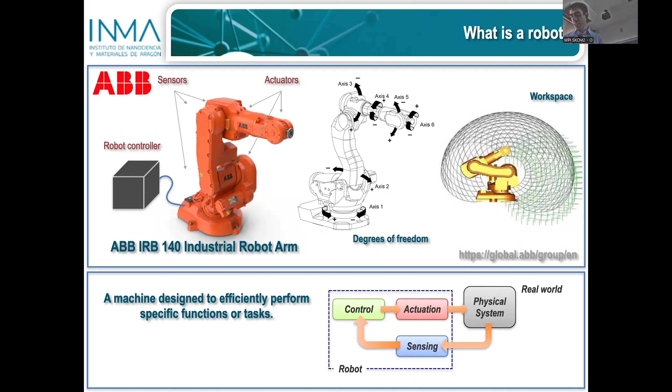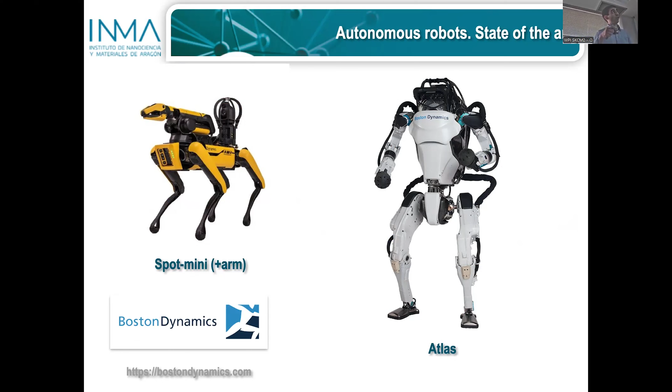Beside these fixed robots, we also have mobile robots—here are a couple of examples from Boston Dynamics. It's really amazing to see how these robots can move. In this case the robot is mobile, so the workspace is enlarged, and it's also more uncertain, unknown in principle. So these loops of sensing, control, and actuation need to become more complex and be done in a more precise way, so the system can go ahead with its function.

Well, I go to the materials. The robots we just saw are mainly made out of metals.

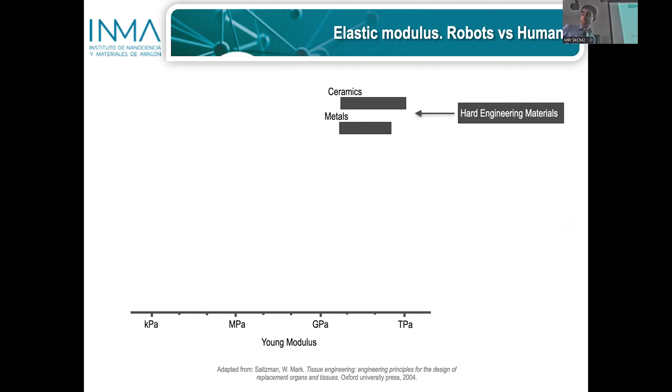They are metallic parts. In terms of mechanical properties, we are in the range of hundreds of gigapascals. If we compare this with the mechanical properties of biological tissues, we are in a different range, in the best case, in the order of some gigapascals in the case of bone. But if we go to softer tissues, then we go to Young's modulus in the order of a few kilopascals. So there is a large difference between the materials used in conventional robots and the mechanical properties of biological tissues.

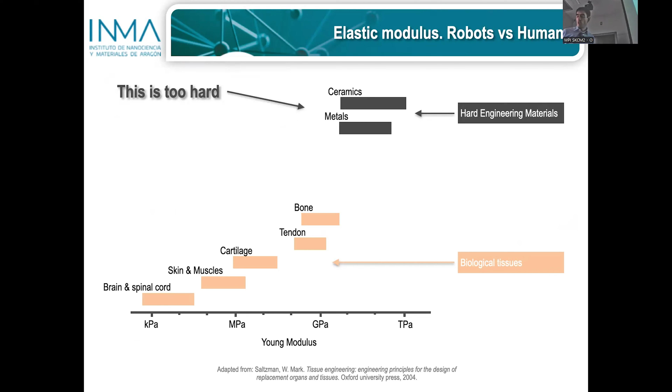So these materials are too hard. This raises some concerns in terms of the interaction of these robots, when collaboration with a human is needed, or when a robot is used to make some action into a body, for example surgical robots. This is why softer materials like hydrogels, elastomers, and plastics are becoming relevant, because we want to incorporate these into robots so that the interaction is softer.

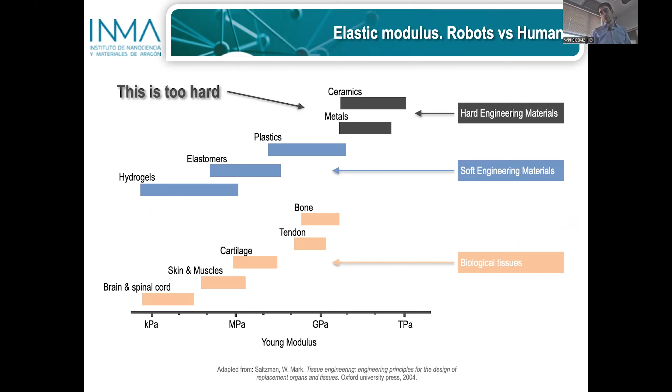And this brings me to one of the topics of the tutorial: soft robotics. Here you have a soft robotic hand made of elastomeric fingers. These fingers are engineered in such a way that they have inner void channels that can be pressurized, and when pressurized, they are able to grab objects in a delicate way.

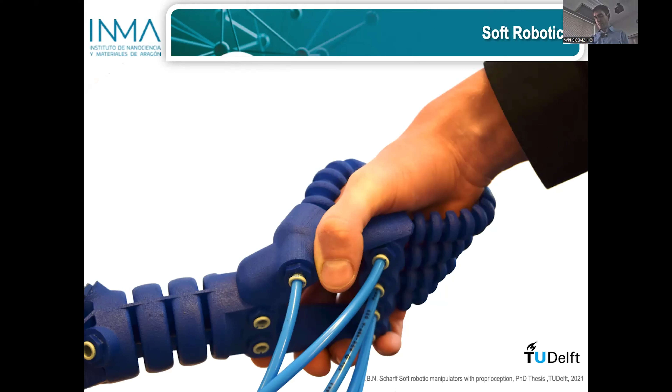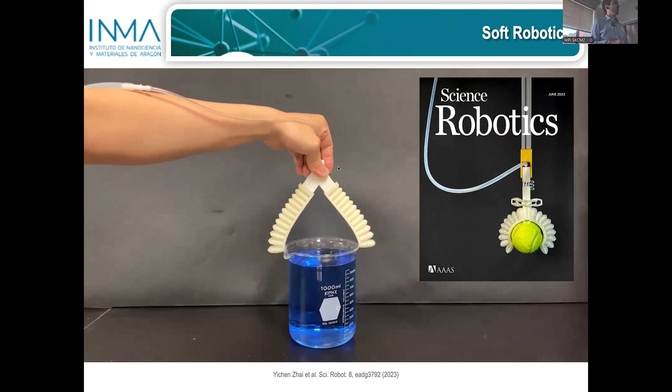So there is a safer interaction with humans. This is another example taken from the literature. It's again a pneumatic system, engineered so that there are differences between one side and the other. This marks the way it will deform when we apply pressure. Here you see how, by controlling the pressure, the gripper can hold a delicate object, a glass object with a certain weight, something that is not obvious for a conventional hard-made robot.

So this brings us to the differences between conventional hard robots and soft robots. While in conventional robots we have metallic parts, rigid elements and joints that pose difficulties to handle delicate objects, in soft robotics, parts of the robot are made up of silicone rubber or rubber.

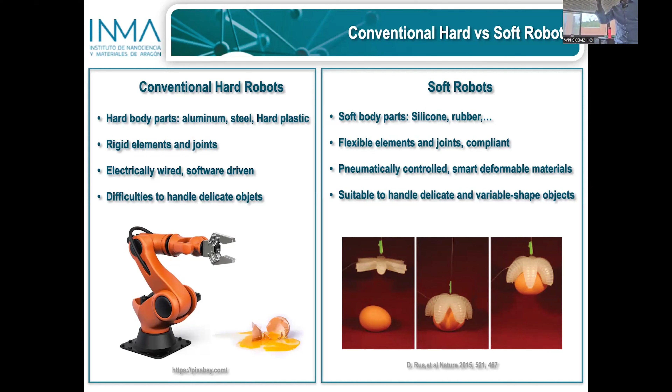They are flexible, with flexible joints. They are compliant, they adapt to the objects they interact with by deforming, and therefore they are more suitable to handle objects that are delicate or that are changing in shape in a continuous fashion, for example very soft objects that deform while you are taking them.

Besides pneumatically driven soft robots, there is a strong interest and trend in using as a soft robotic material, as a material for soft robotics, smart materials. As you know, smart materials are materials that change one of their properties in a strong, important way when they are excited with an external stimulus.

It can be light, heat, or humidity. These materials can be used to generate soft actuators, smart polymer systems that respond and deform in a prescribed fashion when excited. Among these smart materials, I will go briefly into three types: hydrogels, shape memory polymers, and then I will focus on liquid crystal elastomers.

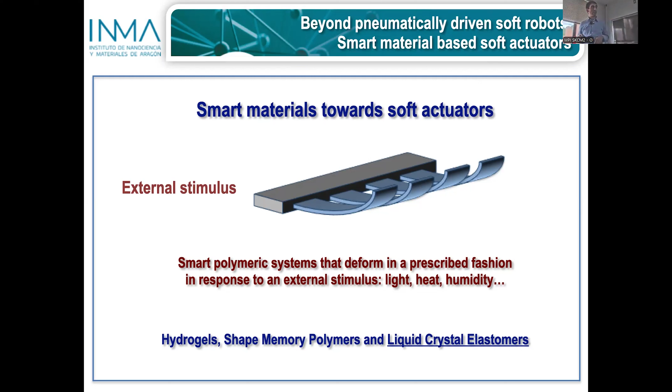That is the focus of today's tutorial. So very simply, hydrogels, as most of you will know, are polymeric networks that are hydrophilic. In the presence of water, they swell and increase their dimensions, and they can change dimension several times. If you then try to extract the water, they deswell again, showing two-way deformation, a reversible effect of the stimuli.

As a disadvantage of these materials, they are very soft, which can be good in certain applications but a limitation in others. They are typically slow in response because they need to uptake water, and due to their very soft nature, they also have a limited ability to generate force.

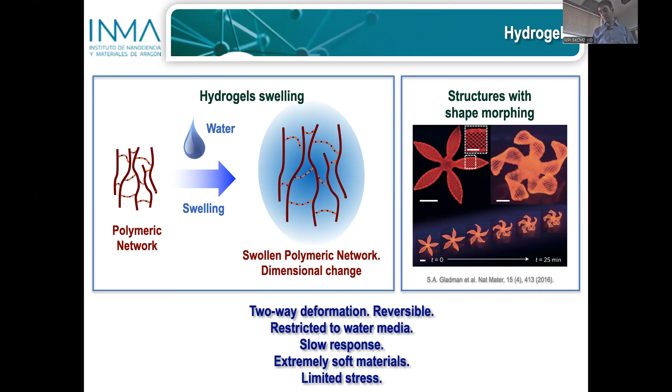Here you have a beautiful example from the group of Jennifer Lewis, in which they printed hydrogels and controlled the deformation of them.

Another type of material of great interest in this area is shape memory polymers. Initially you have a material with a certain shape. You heat the material above a certain transition temperature, that can be, for example, the glass transition for an amorphous polymer, and then you apply a force and a stress.

You impose a deformation to the material, and while imposing this deformation, you cool down the material. In this way, you program the material and fix this deformation, which is released back to the original shape by heating the sample above the transition temperature.

With these systems, you can program, for example, this stent-like actuator made out of a shape memory polymer, programmed just by stretching it in the hot state. You cool it down, and then by heating you can recover back the stent's expanded shape.

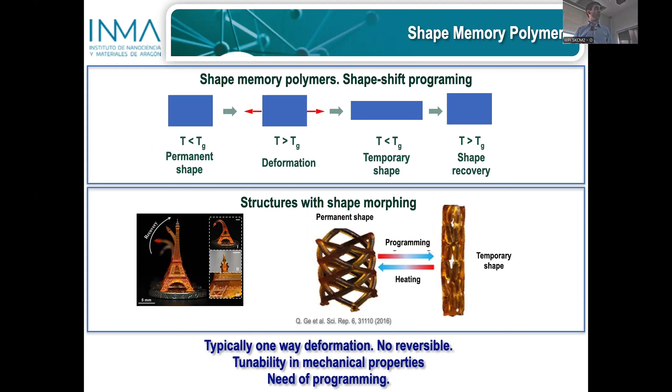Typically, these are materials with one-way deformation, so they are not reversible. A big disadvantage is that they need mechanical programming, which for complex shapes is not always obvious. Also, they are very nice in terms of tunability of mechanical properties.

Finally, we go into liquid crystalline cross-linked systems, which I will focus on more because it's for the rest of the tutorial. These are polymeric networks in which the constituent units are liquid crystal molecules. I will skip the rest of the slide intentionally.

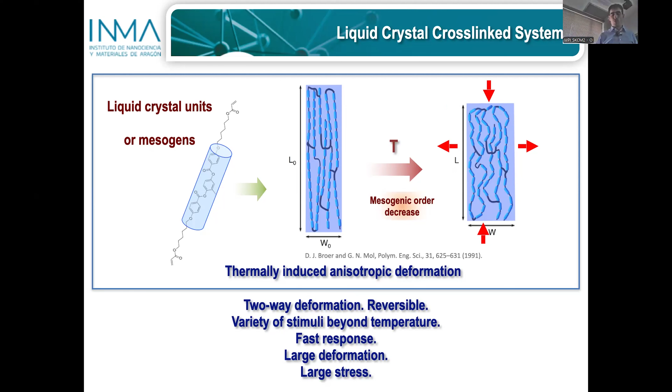I will go back later because I want to revisit liquid crystals. It appeared in some of the lectures these days—I remember Alenka presented on it yesterday. Just to make the tutorial self-contained, we'll also give some concepts on liquid crystals.

Most of you know liquid crystals are made out of molecules with strong shape anisotropy, like this rod-like molecule. This type of material shows intermediate phases between the anisotropic crystal, well ordered, perfectly ordered solid, and the isotropic liquid. In the liquid crystal phase, also named the mesophase, it retains the orientational order of the crystal and has the fluidity of the isotropic liquid.

So they are materials that, in their low molecular weight version, can flow, but have anisotropic properties due to the anisotropic orientation of the molecules, which translates into anisotropic macroscopic properties of the material.

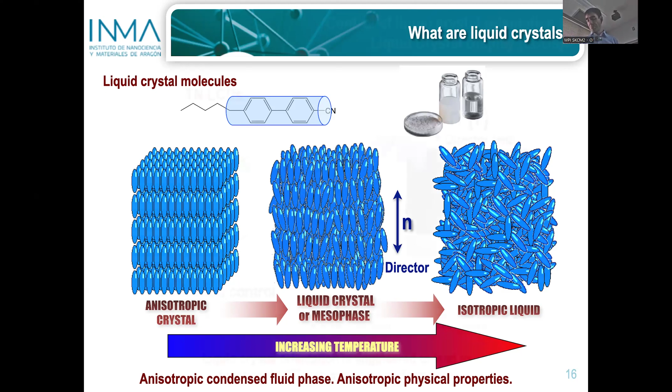...is that you are able to control the orientation at the glass surfaces, controlled in a perpendicular fashion at each surface. The elastic energy does the work to generate this twist, and by applying an electric field at each pixel, you can reorient the liquid crystal and change the optical properties of the system, playing with the polarization to build the electro-optical switch in each pixel of your display.

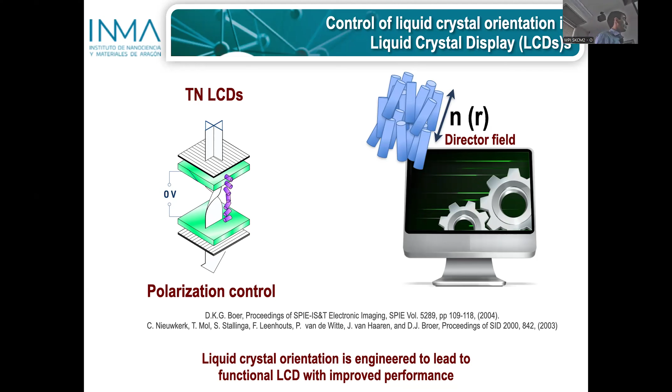Okay, going to how we get this orientation—this can be obtained by simply rubbing a very thin layer of polyimide coating on the glass. You rub this with a velvet cloth in a linear fashion, and then you get grooves, producing orientation of the molecules.

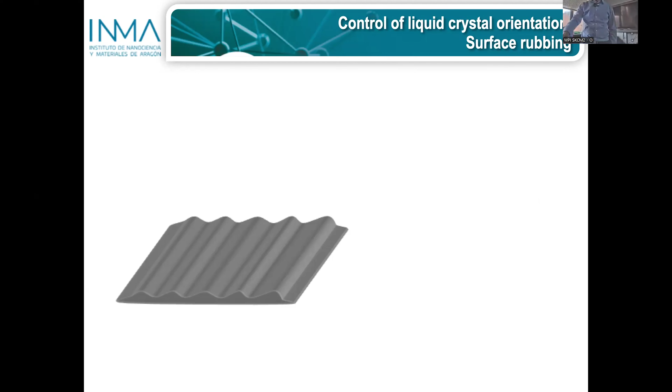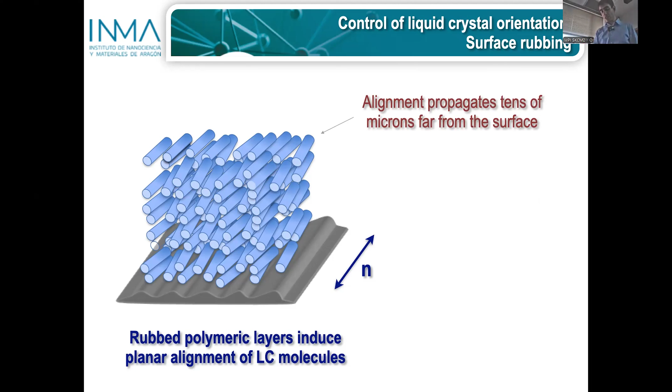You get grooves in the polyimide, and if you put a liquid crystal on top, the molecules close to the surface align parallel to the grooves. Due to the elastic character of the liquid crystal, this alignment propagates far from the surface, typically on the order of tens of microns. Above tens of microns there is a limitation—the liquid crystal order is lost and is driven by other factors, no longer following the orientation of the substrate. As we will see, this will be a limitation in our case.

Another method to get alignment in liquid crystals is with photoalignment materials, photoalignment layers like these polyvinyl cinnamate materials, called linearly polymerizable polymers. If we expose them to UV light and later put a liquid crystal on top, the liquid crystal will follow the polarization of the light. Depending on the material and the dose, the liquid crystal molecules can align parallel or perpendicular to the polarization, but in any case the material registers this polarization of the light and transfers it to the liquid crystal.

So we can advantageously use photolithographic techniques to generate complex patterns in the polymeric layer, which will later be transferred to the liquid crystal that we put on top.

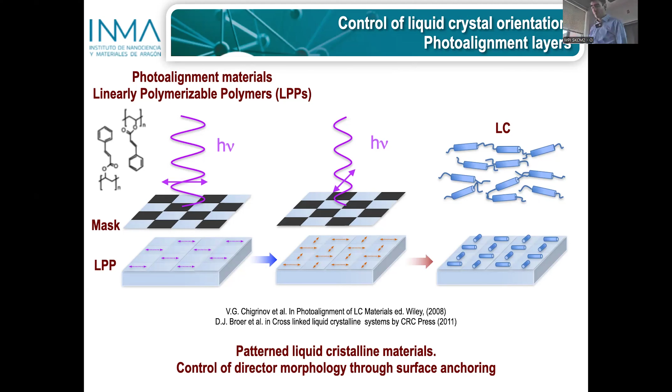Okay, I'll explain how to generate oriented surfaces.

We used low molecular weight liquid crystal molecules in the liquid state - they can flow and orient. But if we use liquid crystal molecules provided with acrylate groups, reactive groups at the end, we can orient them in the low molecular weight state as we saw before, and by including a photoinitiator and exposing the system to UV light, we excite the photoinitiator and grow polymeric chains, linking these acrylate groups to form a polyacrylate chain, fixing the orientation we got in the low molecular weight state.

So we can play with the low molecular weight system and generate a cross-linked system with this. This technique is called in situ polymerization, developed at the end of the 1980s by our friend Dick Broer.

Now we go back to the slide I skipped before. Essentially what we have is this polymeric network, a liquid crystalline polymeric network, a cross-linked system that, depending on the degree of cross-linking, we call a network or an elastomer. Elastomer is low degree of cross-linking, network is high degree of cross-linking, and this impacts the mechanical properties but also the degree of deformation we are able to achieve.

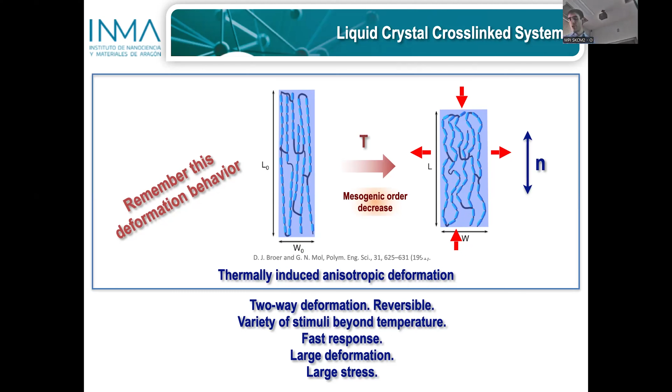Advantageously, you can use a variety of stimuli, as we will see later with examples. They have a relatively fast response. In the case of elastomers, they show a relatively large deformation and can exert a reasonable amount of force, bearing in mind that they are soft materials.

Here I start - we already have the materials, we already explained the materials, we already explained some tools for processing these materials, and now we can have some fun. We can progress towards demonstrating some applications. I want to present a work - actually a long-term project in the group at the Technical University of Eindhoven with Professor Broer and Professor Danqing Liu, who is an affiliate partner of this institute.

In this case, what they did was use these reactive mesogens, low molecular weight molecules provided with acrylate groups, doped with a chiral dopant, and put this material on top of a substrate. The alignment is such - the treatment of the surface is such - that the helices lie parallel to the substrate. So the liquid crystal helices, the chiral nematic, is organized this way. We can see this material as composed of homeotropic regions where the molecules are pointing upwards, or planar regions where the molecules are parallel to the substrate.

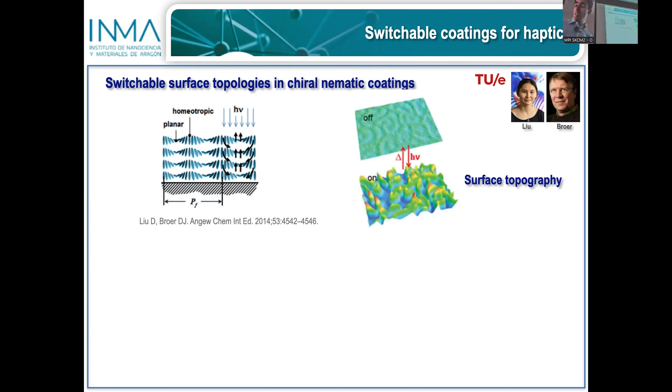Actually, this was very recently published just this year, bringing the group of Eindhoven and Ivan's group together to start this collaboration.

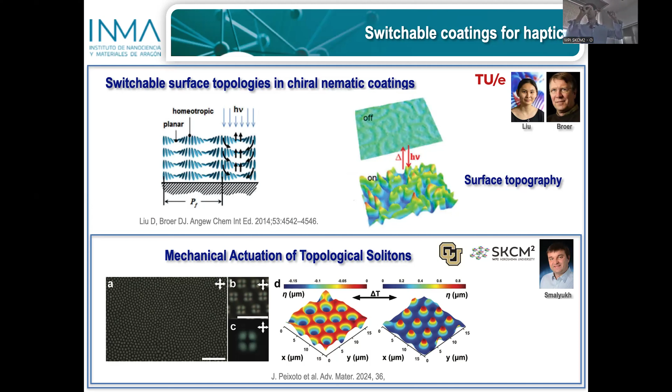Again, having a substrate and this type of material, it was possible to generate topological solitons, either isolated or arranged as self-assembled patterns. Solidifying them with this in situ polymerization technique into a liquid crystal elastomer, upon heating you can get large differences in surface relief localized at the position of the solitons, having potential in haptics applications - this type of protrusion can be felt with the fingers.

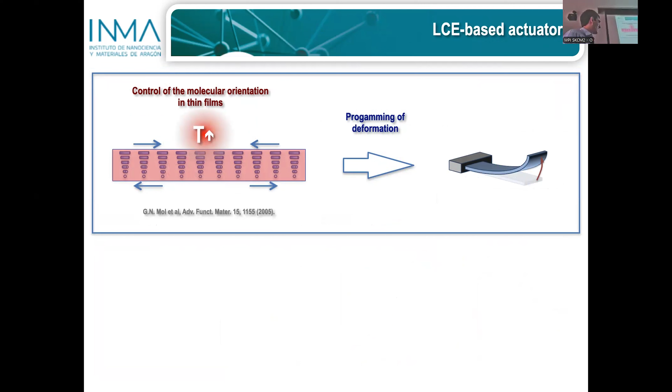Fly traps often store mechanical energy and release it suddenly. But you're not talking about that, right? No, it's progressive. Yeah, the real fly trap is a different mechanism, of course.

Yeah, but the real fly trap is a bit more sophisticated. Thank you.

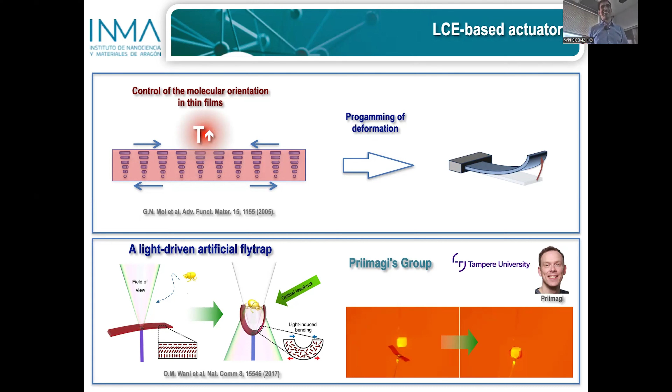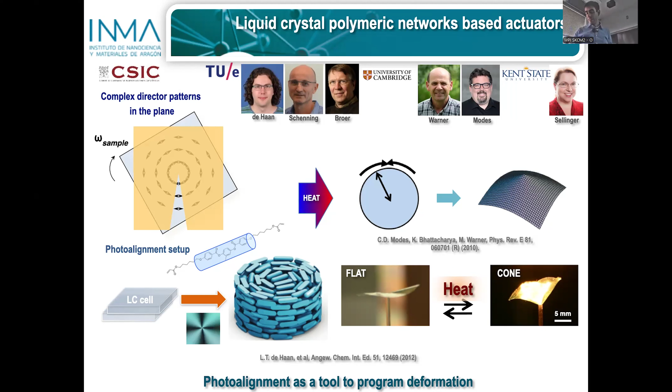If you now heat this material, as Mark and Carl predicted, remembering the deformation rule of liquid crystal elastomers, the system will try to contract around a circle and expand along the radius. But we learned in school that this is not possible — you cannot make a circle smaller by increasing the radius. This can only happen if you go out of the plane and turn it into a cone, where the generatrix becomes longer and the base smaller. So the system, to release the stresses, escapes into a cone. This sample is flat, not totally flat, but when you heat it up you get this cone — later we will see better ones. This tells us that all these alignment techniques allow us to program the deformation of the system.

I showed you until now a couple of techniques based on treatment of surfaces, surface rubbing, photo alignment. All of them accomplish the alignment of the liquid crystal by interaction with the surface. But this alignment propagates only a few tens of microns, so the films we can generate with this technology are in the order of tens of microns, not more. So the amount of energy available in this actuator is rather limited. The processing methodology is also quite complex.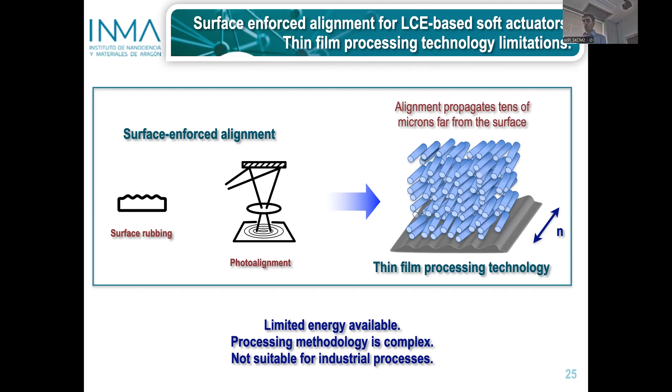I showed you in the previous slide that you have a sandwich made out of glass. You cure the material, you have to break the glass, and many of the samples die in the process. Later you need to cut the sample. It's a complex process that's nice for proof of principle, but it's not suitable for industrial fabrication or production.

So we thought that 3D printing could be a solution. As is very well known, 3D printing is the addition of material layer by layer to create complex objects, and this is very useful to generate prototypes rapidly or to generate personalized objects. But typically, the materials used in 3D printers are thermoplastics, especially for the fused filament type printers, and these generate objects that are inanimate, that do not change shape over time.

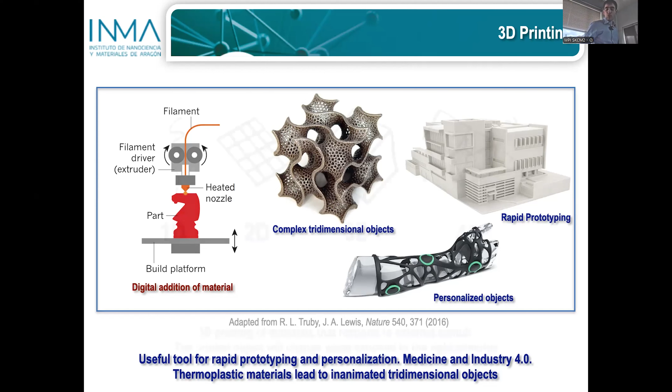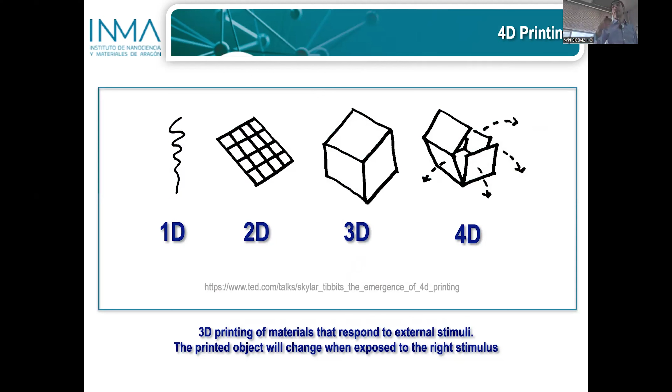Here I bring the concept of 4D printing, introduced by Tibbits from MIT, I think in 2013, 2014, that introduced time as a fourth dimension. Many times 4D printing implies the printing of smart materials to generate three-dimensional objects that change over time when they are exposed to the right stimulus.

In this scenario and context, we developed this in parallel to Professor Taylor Ware at the University of Texas, and Jennifer Lewis at Harvard. We developed the 4D printing of liquid crystal elastomers, and for this we generate a main chain polymer made out of these mesogens provided with acrylate groups at the end.

We generate this macromer by Michael addition of a butylamine and a reactive acrylate, a mesogenic diacrylate. We have this molecule, we add a photoinitiator, and then we can extrude this material through a needle. We can print it, and after printing it, we can cure it with UV light. As we have a photoinitiator, it triggers the polymerization reaction of these groups, so we get a cross-linked system, and we get a liquid crystal elastomer.

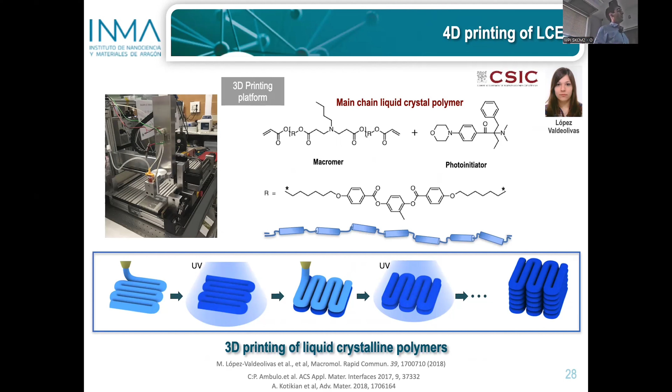This is the time I still have. Okay, thank you.

Printed at different speeds, and we can see that the higher the speed, of course at a constant flow rate, we get thinner layers, and especially for the higher speeds, what we can check with polarization optical microscope and with dichroism measurements is that we get alignment of the molecules, as you see in the cartoon.

So with this technology, we gain digital control of the director, digital control of the morphology of the material. We can control how the molecules are aligned during the printing process.

We can later release these fibers by using a sacrificial layer of polyvinyl alcohol. We remove the polyvinyl alcohol just by immersing it in water, a very simple process, and we get this straight fiber.

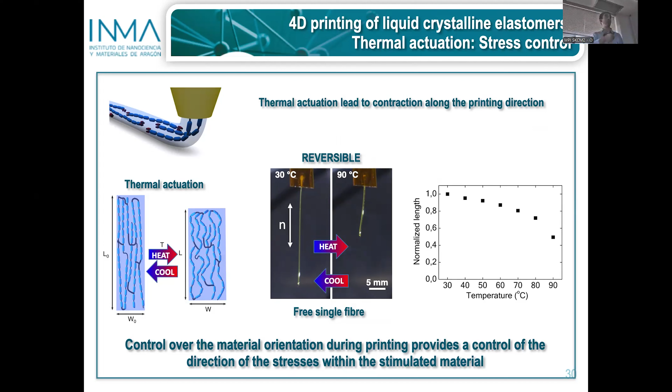When we heat it up, as expected, we get a fiber that is shorter, that contracts. If you look carefully, you can see it also has some expansion in the perpendicular direction. So this digital control we have in the morphology is now translated into a digital control of the stresses we have in the printed material, in the liquid crystal elastomer.

We can get continuous layers of material by printing adjacent lines, and here you can more clearly see that the stripe on heating contracts along the director, along the preferential orientation direction, and expands, as you can see in the plot. Due to the additive character of the system, we can generate multiple layers, so we are not limited anymore to the thin layers we had with the previous thin film technology.

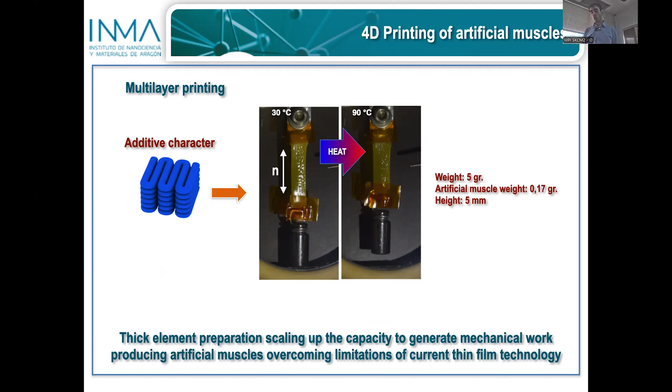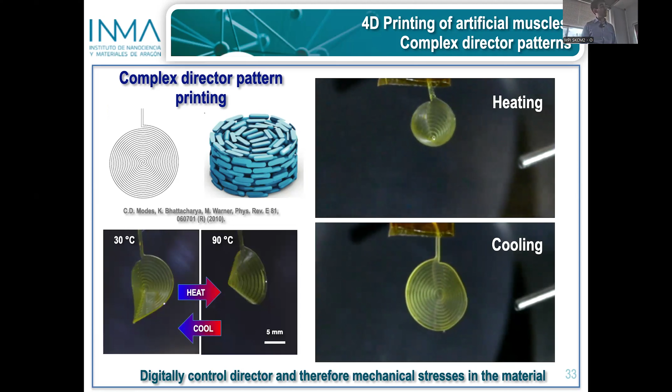Here you have again something, it's a spiral pattern that is a good approximation of the azimuthal pattern that we saw before. Here you see the sample at 30 degrees, but when you heat it up, as we explained before, the system goes into a cone. Now it is more clear, more neat, and when cooling, the system recovers the original flat state. So we are able to control these stresses in a quite precise way.

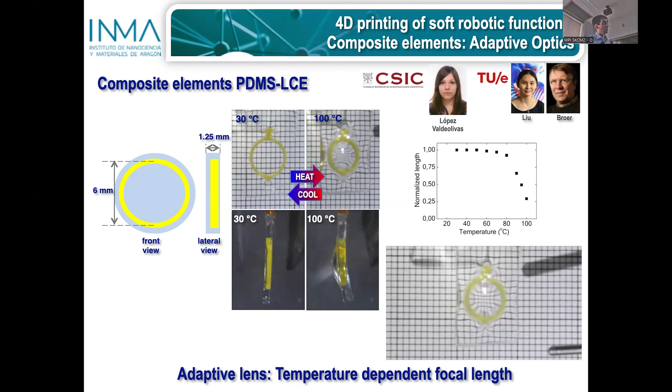We have also embedded these materials in PDMS, in other elastomers. Here you have a ring of our material embedded in a slab of silicone, of polydimethylsiloxane, and on heating, due to the asymmetric positioning of the ring with respect to PDMS, we have buckling. This compression causes the PDMS to buckle out of the surface and generate a lens, whose focal length depends on the temperature.

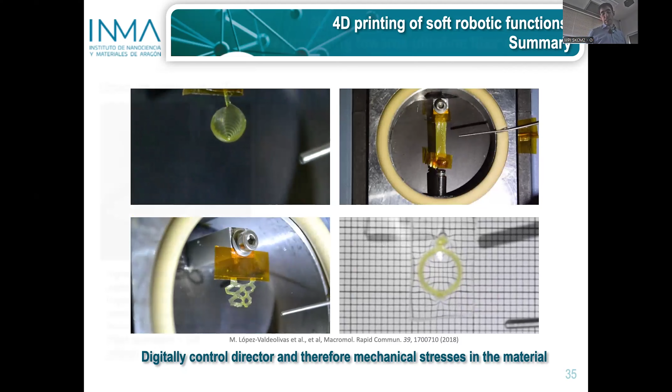So, as a wrap up of this part, the digital control of the director allows us to get digital control of the stresses and implement with these actuators, soft robotic actuators that respond to them.

As I said, we have this, but we are also trying to push the limits of our technology. We see that we have a limitation in terms of the fiber diameter. We wanted to go smaller, but you cannot go to nozzles below 100 microns, because then the pressure is too big, and you cannot generate fibers in this nozzle.

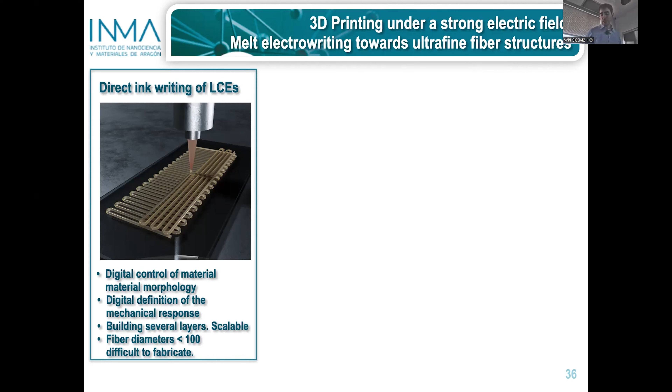So we decided to explore this technique, melt electrowriting. Melt electrowriting is a technique developed by Paul Dalton, released in 2011, and essentially the principle is very similar to that of extrusion, but in this case, a high voltage is applied between the nozzle and the collector, the receiving substrate. So a strong electric field is generated in this area. The polymer gets charged, and the fiber is drawn.

Even having very little pressure, the fiber can be drawn to the substrate, as we will see in the next slide. This generates very thin, ultra-thin fibers that can be precisely, digitally positioned, like you see here in this polycaprolactone system described by Paul Dalton. This has been the main material used with this technique. It's a technique from the biomedical world, so they use this type of thermoplastic material.

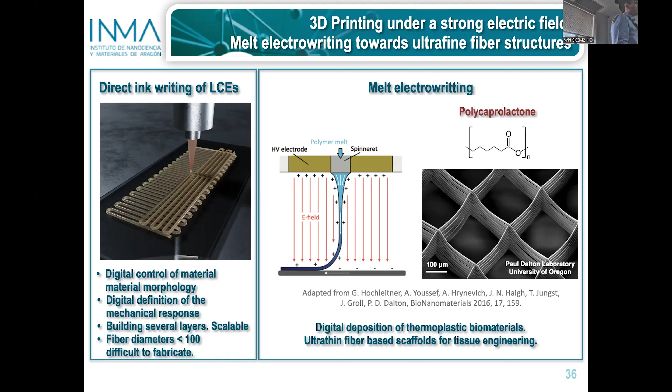However, we decided to try with our elastomers, the same material I showed in the previous slide. If you have no voltage between the nozzle and the substrate, nothing happens - the material is not able to flow. But as soon as you apply a high voltage of some kilovolts, the material appears, gets charged, and is drawn into a fiber, and at the end we get an extremely thin fiber that we can move in order to generate structures.

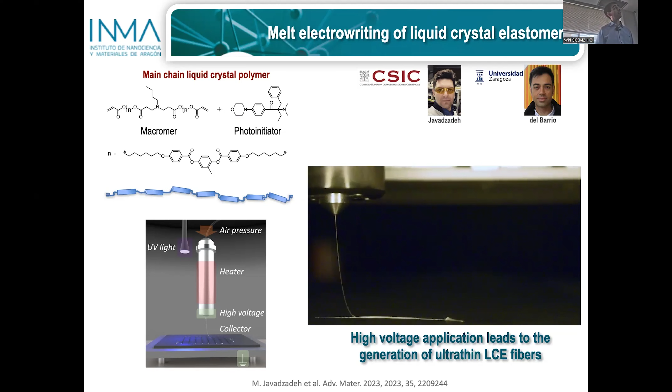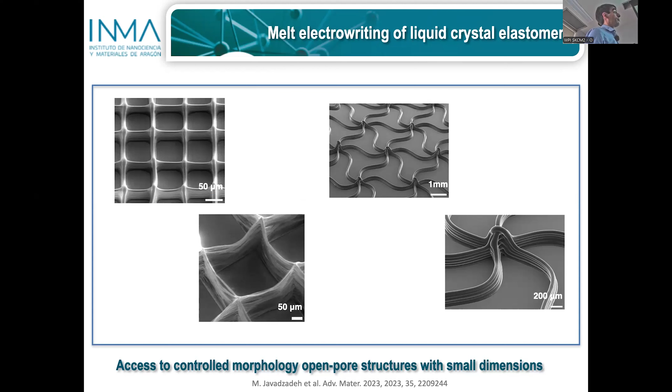As a result, we were able to get structures that you can see here in the order of 100 microns. Actually, we now have much smaller fibers, in the order of a few microns, and spacings in the order of 90 microns. You can also build up walls of material and go to curved structures.

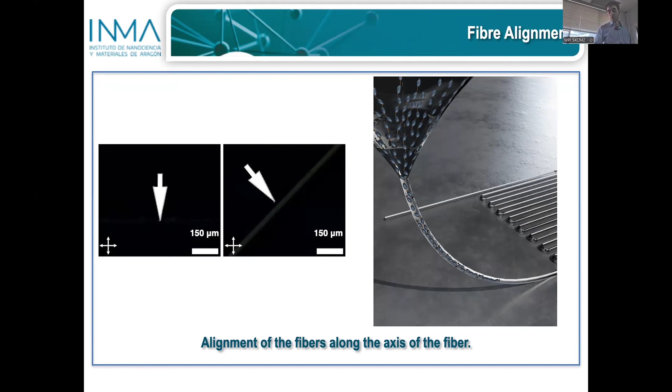Again, as in the case of conventional 3D, 4D printing, this drawing of the fiber towards the collector generates birefringence, generates alignment in the fiber. So again, we gain digital control of the morphology of the material in our structures, allowing us to generate structures that respond mechanically on heating, as you can see in these videos: this auxetic structure that is framed and generates this rectangle, or this anti-chiral structure that on heating makes the nodes rotate clockwise or counterclockwise depending on the node.

Also, the system is able to generate a significant amount of work. As you can see, this small spider net is able, on heating, to raise this steel ball.

Everything I've shown up to now relies on temperature excitation, but in order to move toward applications - since the temperatures we used were quite high - we need to progress toward other types of stimuli, and I will show you a couple of examples. Many of them have been tested in the past with other technologies, but we are focusing on 3D, 4D printing.

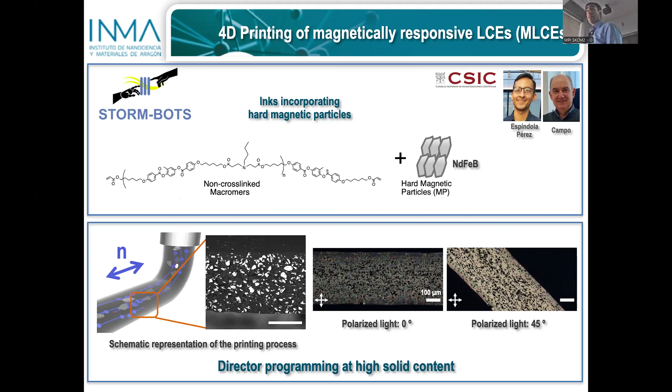So we first go to magnetic materials, a collaboration we did with Javier Campo, also a member of this institute, in which we included hard magnetic particles in our polymers. By appropriate dispersion we can generate an ink that can be printed, and we can maintain the alignment of the liquid crystal despite the high load of magnetic particles. So we can program the director even with such an amount of particles. That is an advantage not possible with conventional techniques.

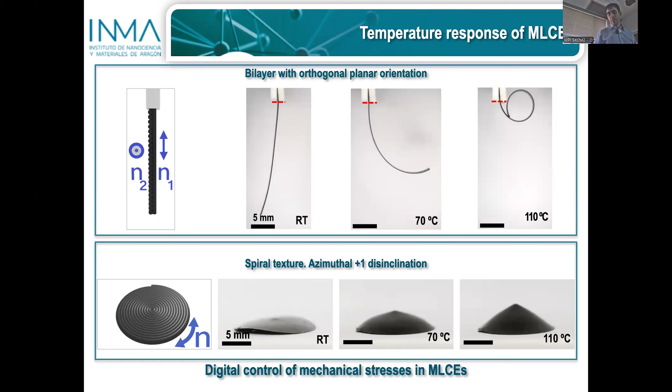Here you have a bilayer, like a twisted nematic, and on heating we get this bending, and again the azimuthal sample turns into a cone on heating. So we are able to keep the typical liquid crystal elastomer mechanical deformation, but we have an extra degree of freedom in actuation, as we have magnetic particles dispersed in the material that we can program with a strong magnetic field. If we expose our film to a strong magnetic field, we magnetize the sample and generate magnetic moments that are stable even at the high temperatures we use for thermal actuation.

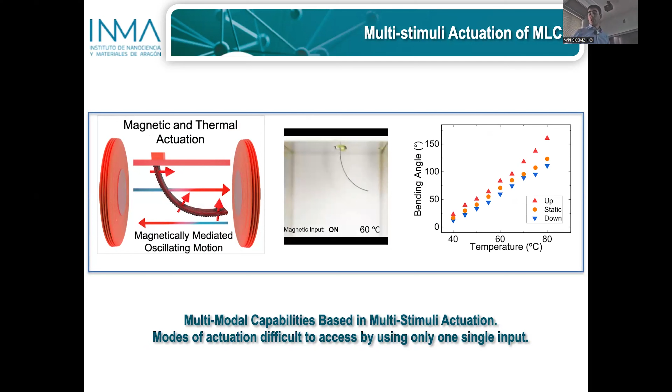So now we can combine these two stimuli, thermal and magnetic. For example, we can heat the sample to generate some bending to a certain level, and then apply an oscillating magnetic field. You can see that we can reach different modes by combining different temperatures and different voltages, generating modes of actuation that are difficult to achieve with a single stimulus.

And we try to make use of these multimodal capabilities. Here you have an actuator that is a bilayer, a bimorph like the other ones. By heating it at a certain temperature, the cantilever bends.

We have put a small mirror in the cantilever, so a laser reaches it and is reflected onto the screen. By changing the temperature, we can move the spot up and down on the screen. But if we fix the temperature, we center the spot at some point on the screen.

Now, if we put a couple of coils, one perpendicular to the plane of the film and one from the back, and apply a small magnetic field in this coil, we get a bending of the cantilever, and then the laser on the screen moves up and down.

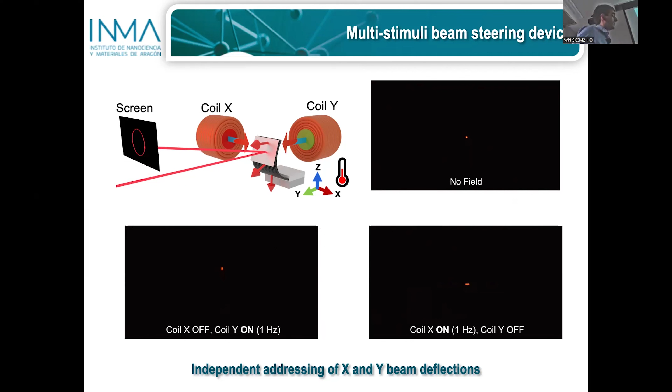If we remove this magnetic field and apply voltage to that coil, then we get a torsion of the cantilever, and then we get a horizontal movement.

We can combine both coils and apply a couple of sinusoidal signals, and if they are in phase, then we get this linear movement. But if we start to play with the frequencies, we can generate a variety of Lissajous figures, demonstrating the capabilities of these multimodal, multi-stimuli actuators.

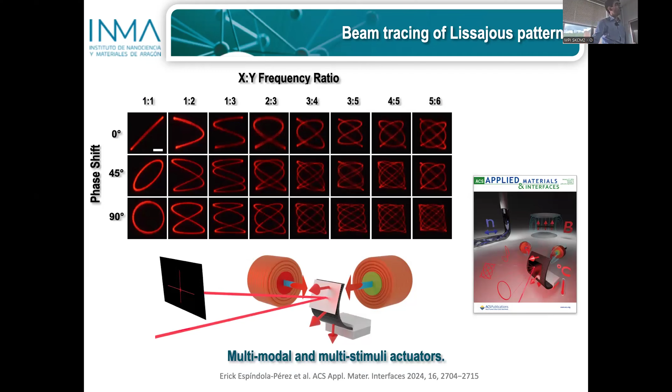We go now to light, because we are being very slow. Obviously, with light you can heat the material. The light, the material absorbs. You can dope the material with molecules that absorb light, and therefore light can be turned into heat. So we will be playing the same game as we saw in the past.

But we also like to include in our system this interesting molecule, azobenzene. In the thermodynamically stable state, it has this elongated pro-mesogenic shape, but when you irradiate it with UV light, it isomerizes into a form that is not mesogenic. This molecule disturbs the liquid crystal phase, and depending on the substituents we put on these carbons, we can make this more or less stable. In the system we will show you, we have a substituent that makes these molecules very stable over time, lasting for a few hours.

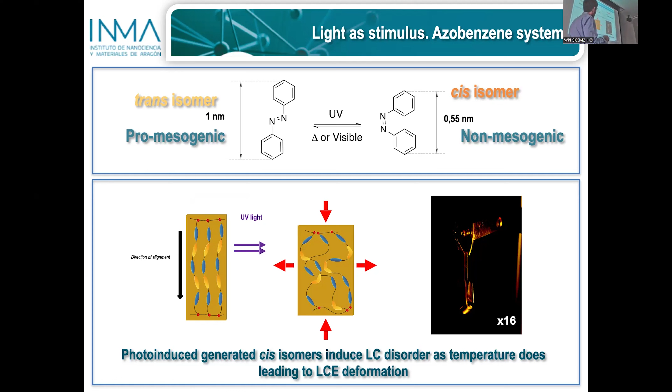So if we expose this to UV light, we generate a strong population of these molecules. If we then irradiate with visible light, or leave it, or heat it up, we go back to the pro-mesogenic shape. We incorporate this molecule into our materials and expose it to UV light, and even with no temperature change, we expect something like this to happen. This was in the literature, but not done with this type of technology. So we included this molecule in our inks, and we can see that upon irradiation we get a strong contraction of the system, also strong heating, as you can see here.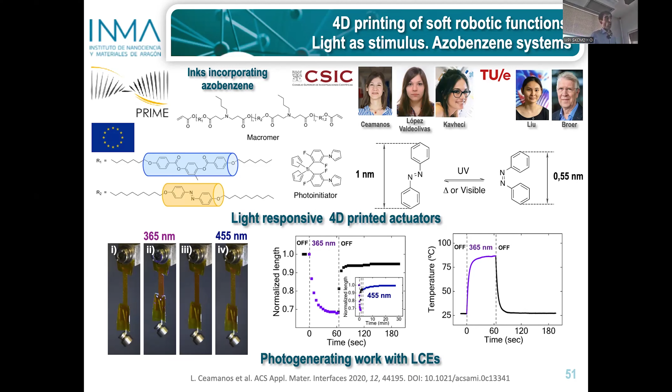When you remove the UV light, you get to a level different from the initial one, and this level is due to the presence of molecules that disturb the order in the liquid crystal. This is checked by immersing the system in water, which we did in this work. You put this in water so the heat is taken by the water, making the photo-induced heating almost negligible. Then almost everything you see is due to this photochemical component.

We have tried to use this to generate a swimmer, an ephyra, that is a baby jellyfish. This creature swims by suddenly moving the lappets down, generating a vortex in the water that propels it up, and later makes a slower movement to recover the shape. So in this way it can swim forward.

We tried to mimic this structure by 4D printing, by 3D printing with our photosensitive material, taking advantage of the fact that when we irradiate with UV light, we have strong absorption in our film. Light is primarily absorbed in the first layer and does not reach much to the top layer, generating a population of non-mesogenic molecules in this region, and all-trans molecules in that region. So the system, to accommodate these stresses, bends towards the light source.

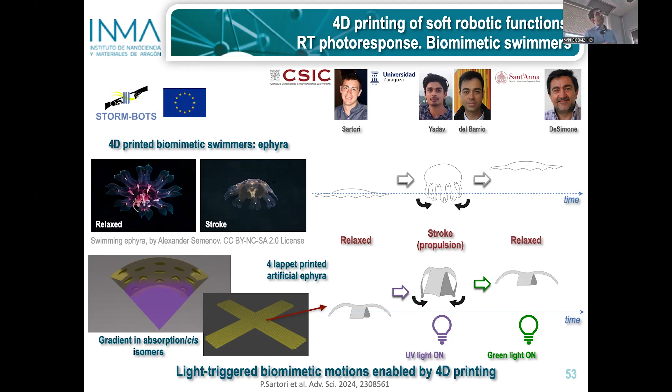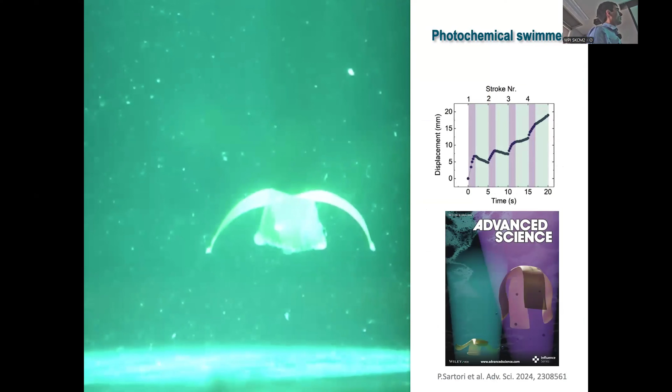By doing this, we expect to have this swimming motion, and by using green light we want to bring the system back. This is after some optimization - this is what we got. This is the little LCE, liquid crystal elastomeric ephyra, that is being sequentially irradiated with UV and later green light to relax, and you can see how it can propel up just with the light.

Now we jump finally as a last example to a system that is purely photothermal. It's this crystalline system that was a very good surprise to us, because we just wanted a dye for photothermal actuation. But in preliminary experiments, we saw the system was changing color, and we thought it was degradation. But after a while, the system goes back to the initial color, so it was, to a large extent, reversible.

After some investigation, we saw that on irradiation with green light, we generate bands in the far red and near infrared region. We discovered this is due to the formation of radicals, as we can see by electron paramagnetic resonance. By irradiating with far red, we recover the original spectra. You can see the difference between the virgin sample, which does not absorb or absorbs very little in the far red, and the sample exposed to green light, which has strong absorption in this region of the spectrum.

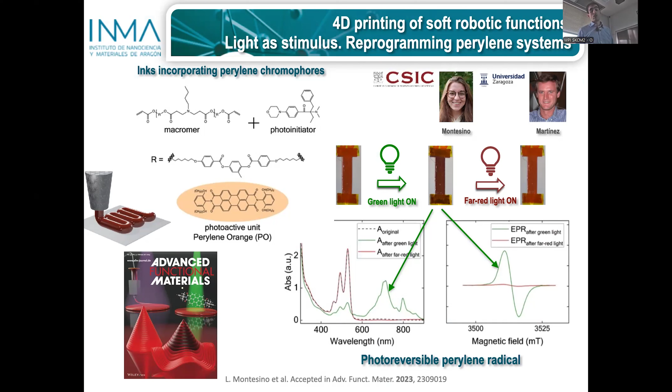So with this, we have a system - the original system - that is not sensitive, or very little sensitive, to far red light. And the 'programmed' system with green light is a system that absorbs a lot of far red light. So we can excite the system with far red light and get a strong deformation.

We have used this to program these materials. In the unprogrammed version, here you have the spiral, and when you irradiate with far red light at sufficient intensity, the absorption is low but sufficient to generate the cone. But if we now pattern the material with this annular mask, we generate radicals in the central part of the sample. If we now expose to far red light, we get a strong deformation in the middle that quickly generates a cone.

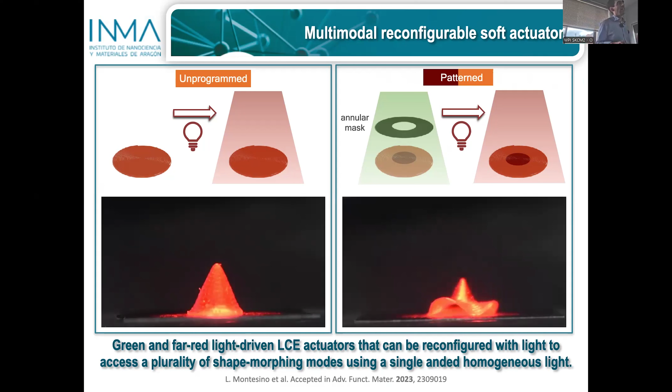But the outer, annular part of the object cannot follow, and generates undulations along the azimuthal direction. Once the radicals are consumed and go back to the normal state, the system recovers essentially the same configuration.

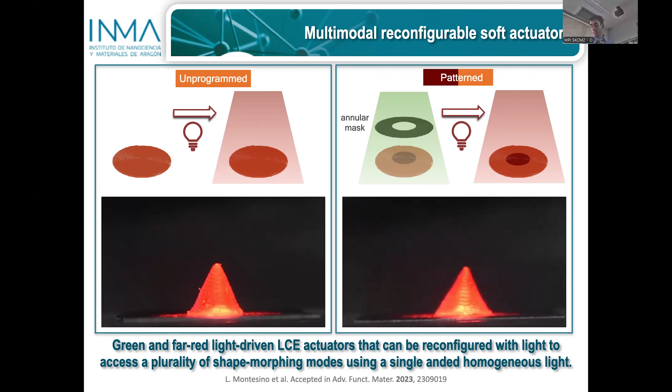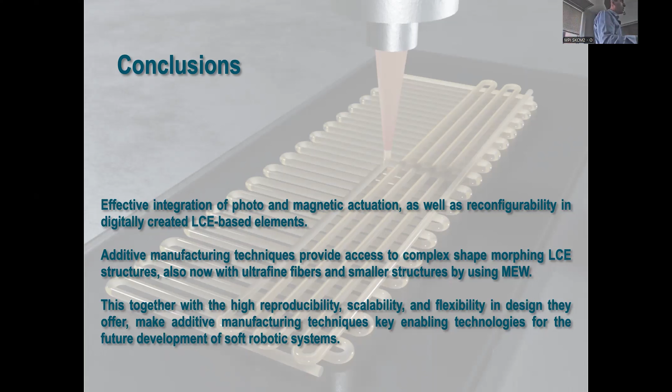I finish, and I think more or less in time. I hope I showed you that we can integrate different functions with additive manufacturing, allowing us to get much more complex architectures, also in small structures by using melt electrowriting. This, together with the scalability and reproducibility of additive manufacturing techniques, makes these technologies a key enabling technology for the further development of soft robotics.